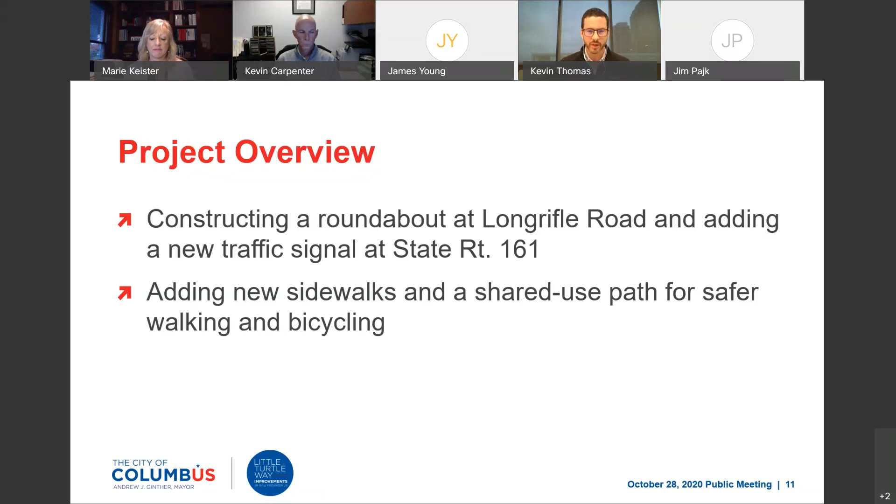Also included in the project are new sidewalks, which will be constructed on the west side of the roadway, and a shared use path, our bicycle pedestrian path, which will be constructed on the east side of the roadway. These will be installed to connect to all of the connecting sidewalks and the communities that adjoin the roadway.

A big part of why we develop these projects is our project's purpose and need. The Little Turtle roadway pavement that exists is badly deteriorated and needs to be rebuilt. It's more than what resurfacing would do — the actual sub-base of the roadway is degraded to the point where we need to reconstruct all of it.

Another big issue in this area is that we don't have any safe areas to walk or ride your bikes in this central part of the neighborhood. This project aims to address that.

Another concern is low visibility at the intersections of Longrifle and Little Turtle Way, since we have two intersections there with the northbound and southbound lanes. This new roundabout intersection and that consolidation will help reduce and eliminate that low visibility situation, allowing drivers to see as they're navigating towards and through that intersection. The project's goal is to address these needs, help fulfill what's missing in the roadway, as well as rebuilding and reconstructing what is out there today.

At this point, I'm going to give it over to Kevin Carpenter. He's going to go into a little bit more detail about some of the improvements and what we can expect with the project.

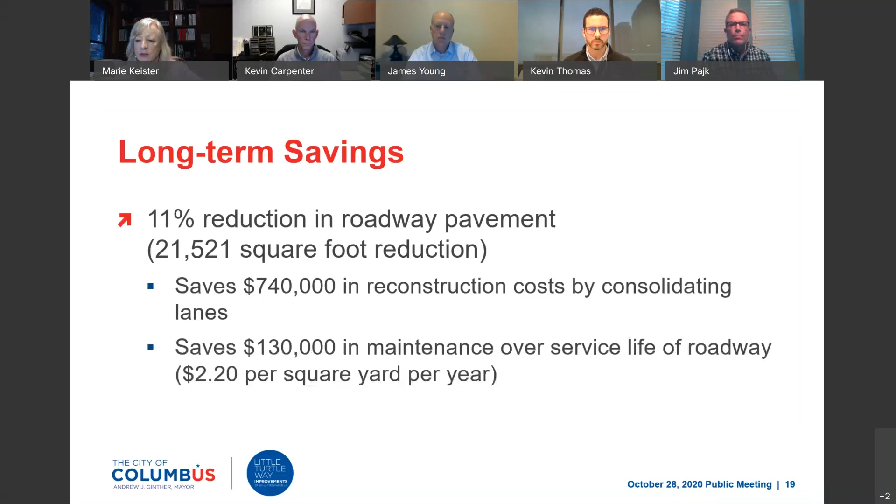Great. Okay, Nick, can you take us back to one of the maps where things are really itemized? And we have a question about the tree. Can somebody point out exactly where the tree is that you're going to protect? The oak tree, I believe, is what we're talking about.

Thank you. There are a number of questions about Parks and Rec and what their plans are for opening their 98 acres for walking and bike trails, and whether that would increase traffic. Kevin, do you want to address what you're aware of on those bike trail plans?

If they're talking about Schaefer Park on the north end of Little Turtle Way, I'm actually not sure. I don't know if any of the other panelists have more information on Schaefer Park. I do know there are some other plans for bike paths and park trails, both in Big Walnut Creek and to the west, as well as Dublin Granville Road on the southeast side of this general area. I have not personally heard of any plans for Schaefer Park opening up access to trails. I don't know if anybody else has other info on that.

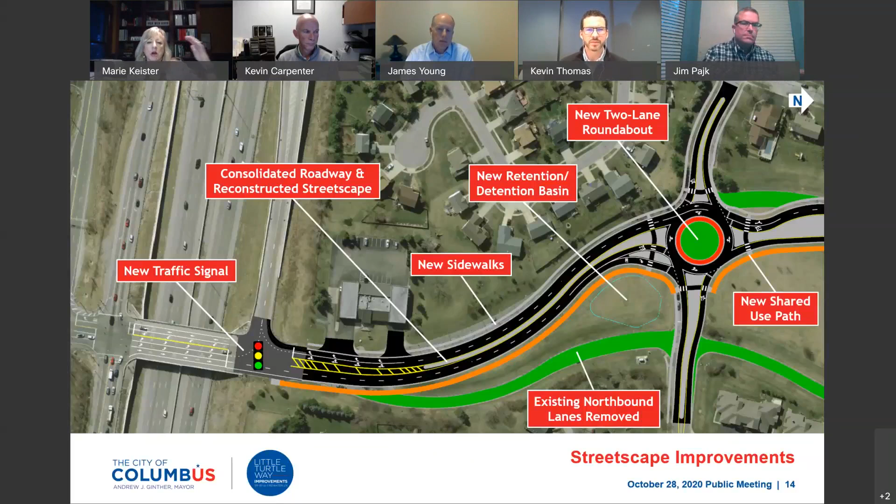And then I got a question for you, James. We're getting some questions about the cost of the project, and how this project came to be high on the priority list versus other streets they may see that seem like they need repaving. Can you speak to that a little bit?

Yeah, this showed up on our capital budget, and we were programming it for reconstruction. When you talk about resurfacing, we go out and look at conditions and program that citywide. I saw that in the comments about a street that needs resurfacing — that goes through a different process and funding process for selection. So this came in and was programmed for reconstruction as a capital project, as opposed to a maintenance project.

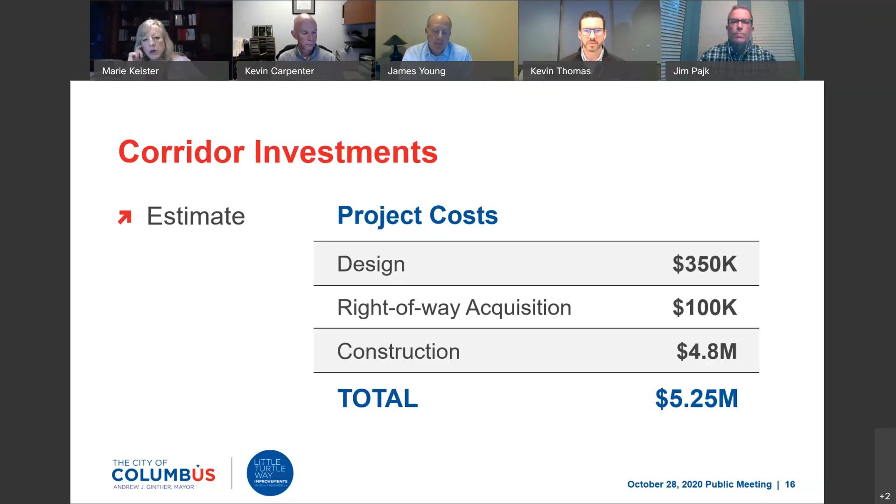Okay, great. And then let's go back to one of those pictures where we can see the acreage that's being affected by the development. Kevin Thomas, we're going to need your guidance here on which map to address — but yes, that slide Nick just flew by is fine, I'm glad he did. This is a good overview slide that broke down how that acreage was split up and so forth. Can you walk us through a little bit about that acreage that's being affected?

Now, of course, a lot of people have questions about specifically what is happening on that acreage and what the developers' plans are. First, I want you to talk about where that acreage is, and then Jim Pajk, if you want to talk about the development side of the equation.

Certainly. So probably the largest portion of the acreage that the city is acquiring for the project is on the south side of Longrifle Road. That entire section between the existing roadway and the proposed roadway is being acquired for the detention basin, as well as the area needed to reconstruct the roadway, the sidewalk, and the shared use path. So all of the improvements we're doing south of Long Rifle are being done in that acreage being acquired for the project.

From the central island and the northern smaller island, the acreage we're acquiring is basically just on the east side of the existing roadway. We'll be utilizing all of the existing right-of-way where the road is, as well as several additional feet — dozens of feet, I believe — along the east side of the roadway to construct the larger splitter island, the diverter island north of the roundabout, plus the additional lane width and shared use path on the east side. We also utilize the existing right-of-way to construct the sidewalk that's there today. So hopefully that answers the question.

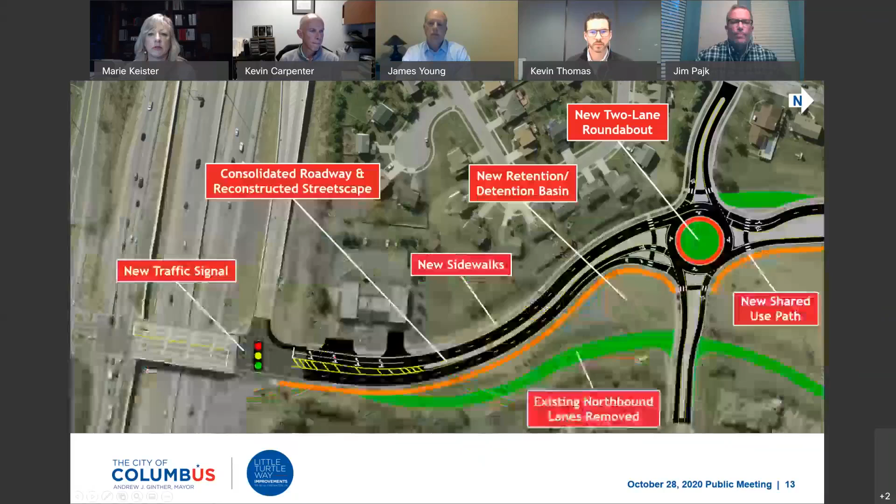Nick, can you take us to the construction slides? Who wants to take that one? That would probably be me.

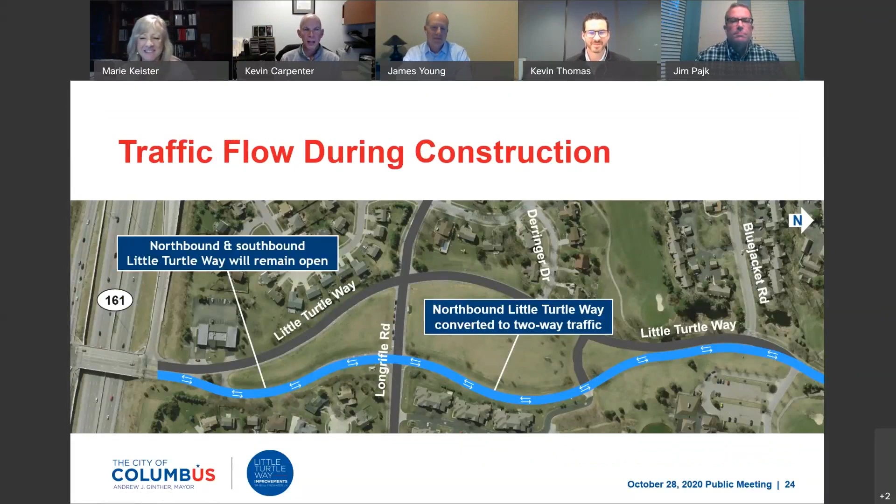As we have in the plans, currently we have 5 phases for construction. In this particular slide, you're looking at phase 1, where we're shifting traffic from the split roadway as it exists today to having a single lane northbound and a single lane southbound, utilizing the existing northbound roadway bed.

In this phase, Long Rifle is open and you can utilize it as you do today, so really no changes to that. As we move into further phases of the project, which are not shown on these slides...

Kevin, stop there. So how long is phase 1? When does that begin? I don't know that phase 1 has a time limit because I'd have to read through the notes in particular. I don't know off the top of my head, but I can get you that answer.

So what you're saying is the phasing may not be sequential. Some of them may be concurrent. Is it possible?

Again, as we've laid them out in the plans and as it will be bid for construction, we have 5 separate phases. So I don't think any of it can be done concurrently, because you can't, for example, build the center of the roundabout, because you're going to have to close Long Rifle to do that.

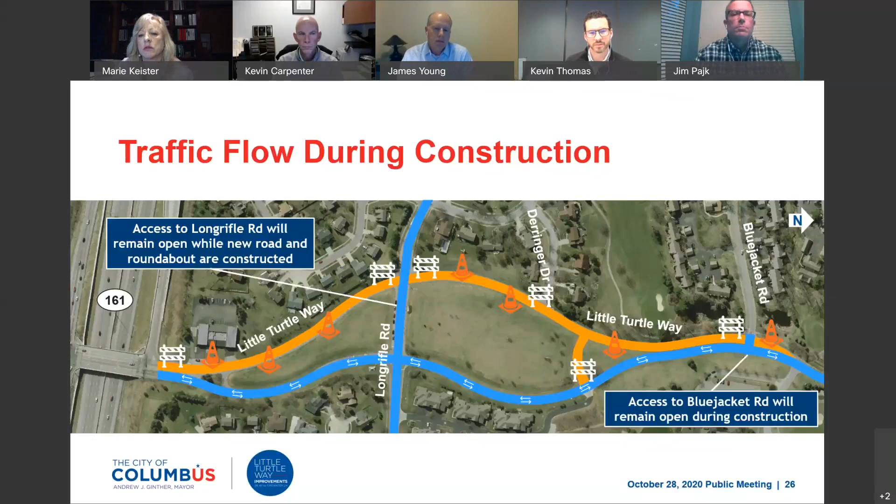Patricia? Yes. I was concerned about what looked to be a consolidation of the traffic lanes as opposed to an expansion, since we've got all this new construction coming in. I hear you guys saying that this is really a project where the traffic study went out a number of years beyond. So I feel a little better about that.

I'm just thinking that if we have traffic congestion coming up in the next 10, 15 years, is there any chance that can be addressed when it comes up? Or are we going to have to live with it for another 30 years or whatever?

Did you all hear that? Yeah, so if I can restate that, frame it for Kevin Thomas - you're concerned that traffic is going to continue to grow, and so with this major improvement being done now, is the city going to be able to respond sooner than 2050, for example, to make any other additional improvements? So Kevin, that's a big picture question. I mean, due to congestion is what I'm thinking. Sure.

Yeah, that's a very good question, and I think the city's always poised to try to address those kinds of issues. James, I don't know if you want to jump in on what this specific project or what this specific area could expect from us that way.

Yeah, let me speak a little to the capacity that's built in, because there were a lot of comments that asked that. The roundabouts have more capacity than just regular stop sign intersections, so let's just start there. The improvements being made down at the signal were - I think Kevin mentioned it earlier - designed actually with ODOT's traffic. They do a 20-year projection. We're looking at all the potential growth in the area. Then you're using the 30th highest hour of the year, so you're actually designing for the 30th worst hour you can have. So we approach this from a pretty conservative standpoint.

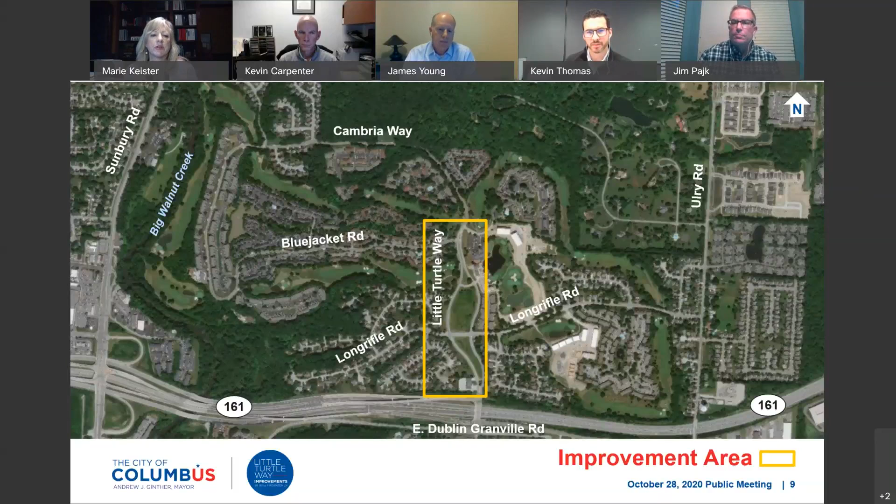So the biggest impetus for any of the projects that we do is, what is the need of that facility? James mentioned it earlier as well. The roadway itself out here has been scheduled for reconstruction, so it's not a situation that resurfacing and milling will address the issue. We would be back out here in 3 to 5 years doing the same thing all over again. The roadway really needs to be reconstructed. It's not really, were we looking for a way to do work out here? This roadway really needs this project.

The changes incorporated in the project are done to help address traffic issues that already exist. New development isn't really necessary to see the backups that are out there. We've gotten 311 calls and we've seen complaints about traffic that backs up off of the 161 ramp. So the needs for the project already existed by themselves.

So our ability to design and construct a project that is cost efficient, that is roadway efficient, helps traffic move in a more efficient manner than it does today, as well as adding in those multimodal facilities, the sidewalks, the bike lanes, addressing the stormwater issues. All of those things we really couldn't do if all we did was resurface the roadway, and then all we're doing is putting a Band-Aid on a problem that really needs much more attention. So there's not really a driving factor outside of any of those project needs. We understand the visible, what it looks like going on out there, but the project itself, I think, speaks for itself. And this project need is a very important part of why we would start or initiate any project of this size.

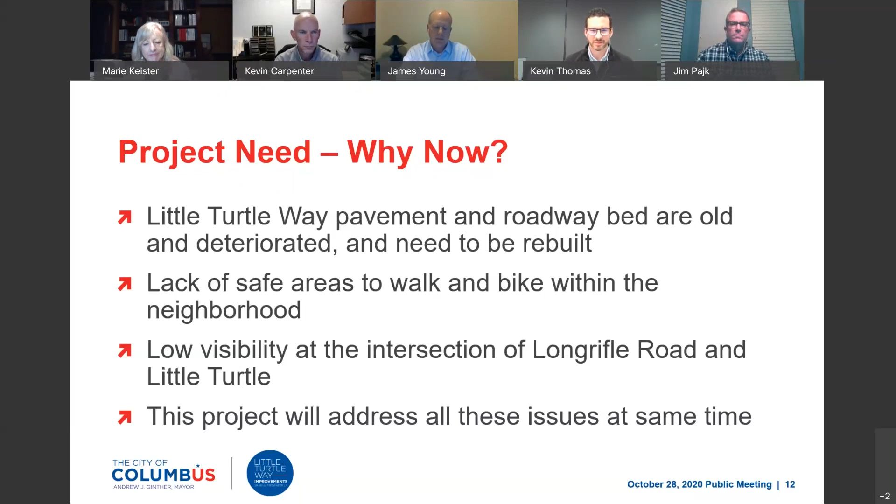Thank you very much. Could you pull up the streetscape improvements overview diagram? Because that's what I'd like to talk about. I think this might be for James.

James, this goes to Patricia's question, and I think you only really addressed the roundabout in terms of capacity in the future. I want to go to the right and look at between Derringer Drive and Bluejacket Road, and you're not showing further up where Firewater Lane is, okay? I drove that here today to get a good idea of things. We're looking at right now 2 lanes on both sides.

Okay, right now for that area, what I'm seeing here is you're going to reduce that capacity down from Derringer Drive to Bluejacket to just 1 lane in each direction. And is that also going to keep that 1 lane in each direction up to Firewater Lane? Because right there where the golf course entrance is and Firewater Lane, you've got all those condos that are being built there. That's just going to dump excess capacity there. So my first question is that.

And the second question is going to Patricia's comment, along with the last gentleman Michael, in terms of design-wise: what happens if this design does not do what's intended to do? And what happens if the capacity's not there? You've only got 2 lanes there, 1 in each direction. Do you have the ability to expand that in the future for those reasons I mentioned? Or if not, why aren't you just going full 2 lanes in both directions now and be done with that, and not have to worry about it?

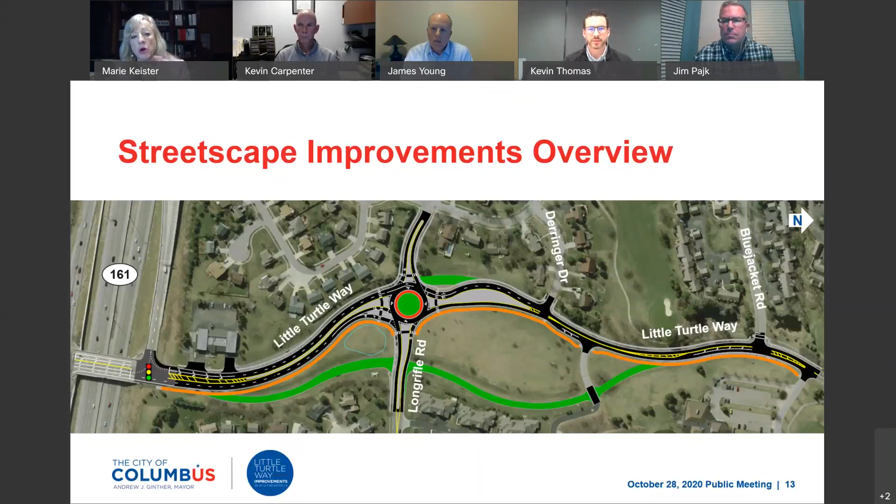And then that other point on the origins of the project, again, I would direct that to James to answer for this particular project. James, before you respond, let me just note it's 7pm. So those of you leaving right now, we are going to be responding to frequently asked questions and posting those online as well. And then secondly, after James responds, next is going to be Rob, followed by Jennifer and Vicky.

Okay, James. So the first part of the question, when we're doing resurfacing, that's programmed and done internally as part of a whole resurfacing program. When we're doing reconstruction, that comes through the capital program. We have been in talks with the property owner for the sheer fact that the median islands are his property. So as we've been going through this project, we have been in conversations with him.

Help me with the second part of the question, Kevin, the origin. What was that reference to? The question was if he had anything to do with the startup of the project. It was part of our capital program when we got our capital budget. We had this as part of a reconstruction effort in the area of the city. We've had it for other roadways too, so not unusual at all.

And then Jim, I think we're going to answer part of that question regarding the walk to the north. Yeah, there was a question about extending the sidewalk or shared use path to the north. Someone mentioned it, and it's also been a written question we've received a couple times. That was a comment we had also received at the previous public meeting, and we have passed that information and request along to our infrastructure management folks who program all the sidewalks in the city. We've also talked to Recs and Parks Department about that. Obviously they're involved in the park to the north, I don't recall the name. So we passed that along, that folks are interested in that as well. I think that is on everyone's radar.